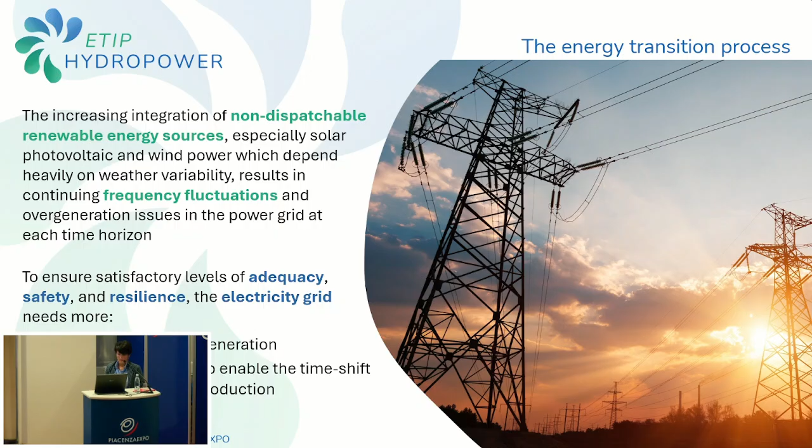And these two characteristics are typical of the hydropower sector. So we have the possibility to refocus the attention on this sector, and there are some values of hydropower that it's important to make people aware of.

Especially policymakers, because hydropower could play a pivotal role in the energy transition, because it can contribute to provide balancing services to the power grid, to stabilize the power grid. And moreover, it has a very important role also in the energy security of European countries, because it can reduce the energy dependence on imports.

This is not subject to fluctuation of fuel prices. And most of all, it's based on European technologies that are of our domain. And it's still the main renewable source that we have at disposal worldwide, but also in Europe and many European countries. So it's a cheap, clean, and reliable energy.

But we have to consider that our assets are aging. As I told you, the energy system is progressively changing. So there are new needs of research, innovation, and development, also in the hydropower sector, although it was considered a mature technology in the past.

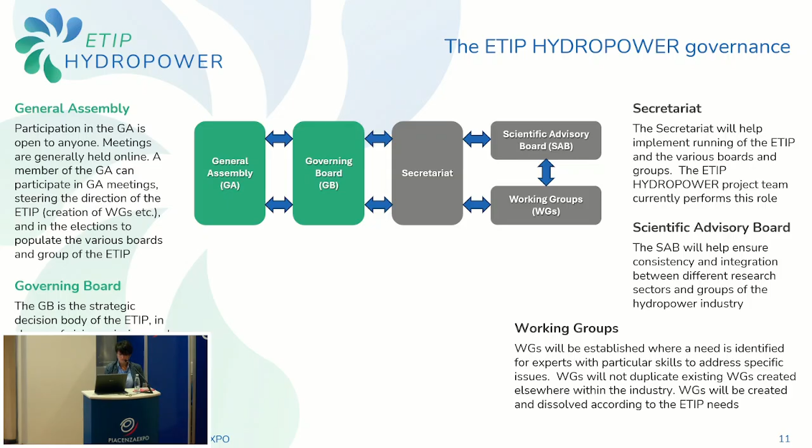An important aspect is that we also establish working groups that have to deepen some issues that we consider a priority of the hydropower sector. And finally, we would like also to have a direct link with the national governments of our European countries. This is important to drive the choice of the European countries and the development of our technologies.

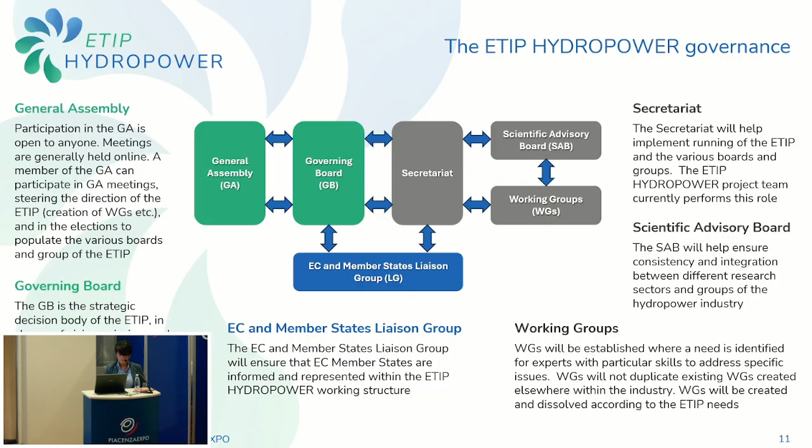Considering the governing board, it has been elected by the General Assembly, so the expertise of the governing board members covers different aspects. We have 5 representatives of the hydropower industry and technology, and 5 representatives of the operators.

We have 2 representatives of the small hydropower plants, because they are also contributing to the energy transition. We have 3 representatives of the designers, planners, and project developers, 2 on finance, business, and insurance, and 5 representatives of research, innovation, and development, so we have the academia inside as well, and 3 representatives of the environmental and civil society sector. We also have a representative of the scientific advisory board.

In total, we have 26 members. The chair is Denis Aelbrecht from EDF, France. I'm a co-chair, one of the two co-chairs, together with Peter Stettner from Andritz.

I would like to show very shortly a tool that is available on the hydropower website: the Hydropower in Europe Research and Innovation tool. It's a very nice tool which gathers a lot of information related to research actions that are ongoing or past, research organizations that are involved in this sector, and the research fundings available in each national country and in Europe as well. I'll show you a slide with some examples of the information you can find in the research action section.

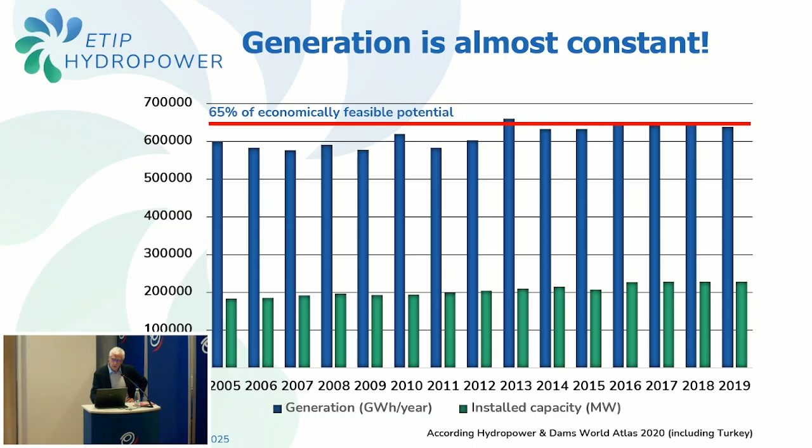So now I would like to discuss the question, what are the main barriers to hydropower development in the European Union? You know, the generation in Europe is almost constant. We have equipped 2/3 of our economically feasible potential, but it's difficult now to tap the last one. However, we see that country by country, there is a potential of hydropower development. You can see on this drawing that a lot of countries have more than 50% of economical potential not yet tapped. And you see now this share of hydro in electricity generation. For example, in Italy, you have well-equipped the country. But now the question is to tap for the energy transition.

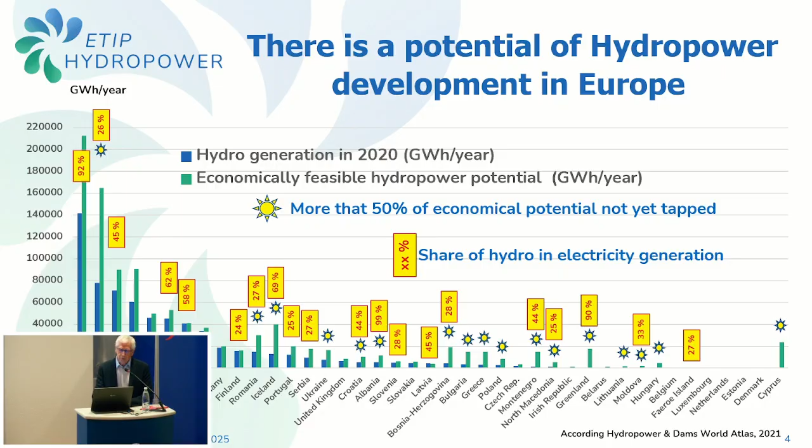There are several reasons impeding hydropower development. And the first barrier is certainly the environmental impact. Look back in the past. In 2000, the World Commission on Dams released a report. It was criticized because it was not really objective. And the conclusion of this report was, do as you want, but if you can do other than a dam, go ahead. In fact, the methods used for this report were not correct.

And some people were paid to protest against them, and 2 experts of ICOLD were paid as well. When it was known, it was a huge scandal. And one of these experts died 2 years after, caused by cancer. So it was a bad period. And at that time, the sector was divided in 2. People willing to improve the environmental impact, and people from third countries saying, no, we have to go on, and this is a strike against our development.

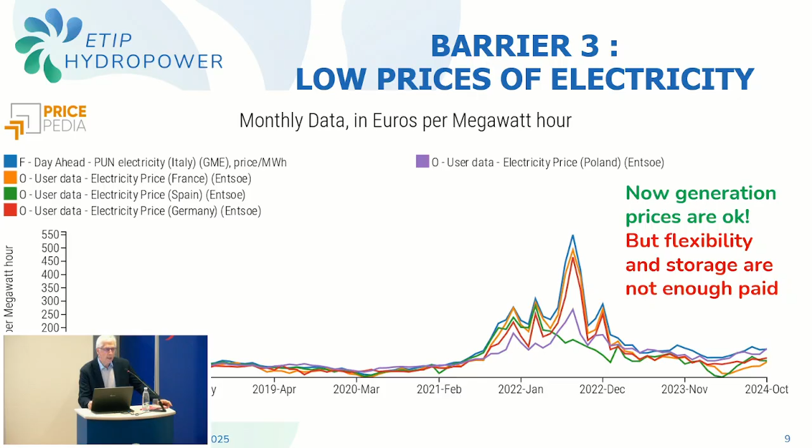A third barrier was the low price of electricity. Up to 2020, up to COVID, you see the prices were very depressed. Then came 2021, Putin cut the gas transport to Europe, and 6 months after, he invaded Ukraine. So you see the consequence on the price of electricity. And now, fortunately, the price decreased, and prices are double what they were before 2020. But the issue is flexibility and storage are not paid or not paid enough. So the next question is how hydropower can overcome these barriers.

The first action is to have dialogue with the European Commission. The good level for economic and technical discussion is the Integrated Strategic Energy Technology Plan, the SET Plan. The SET Plan informs you of energy and research strategies and the new legislation required. And to discuss, we need a place, and this place is an implementation working group. Antonella showed that there are 15 implementation working groups. All energies are in them: batteries, carbon capture, concentrated solar thermal, geothermal, energy systems, nuclear, ocean energy, offshore wind, photovoltaic, bioenergy. But there is no hydropower. How is it possible? So that's why we are demanding this implementation working group. We hope to get it at the end of the year, but it's not certain.

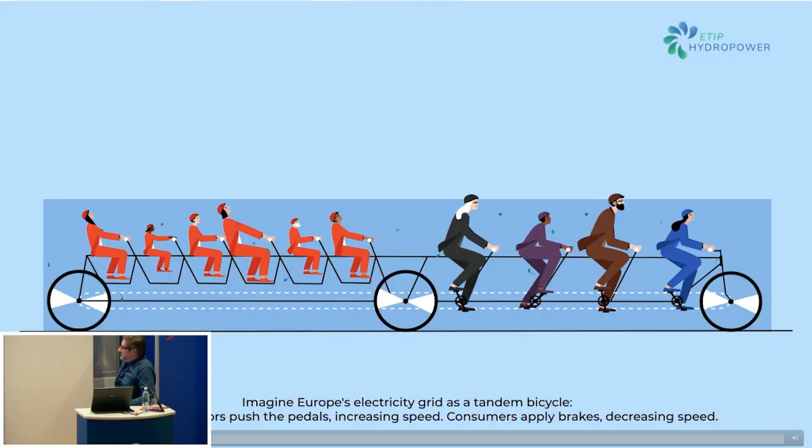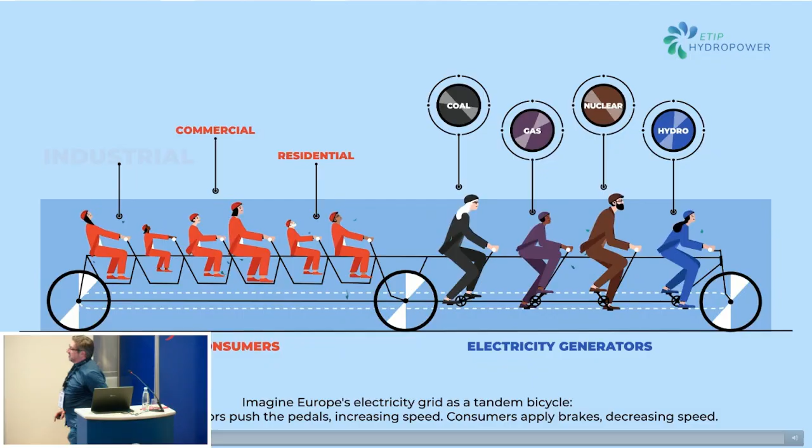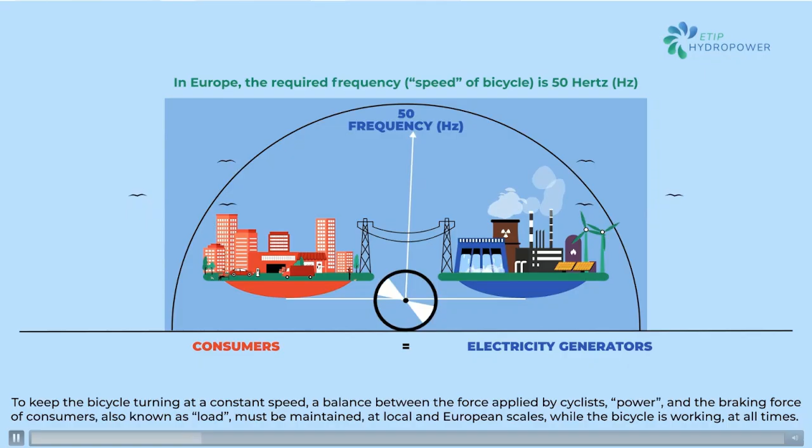ETIP Hydropower Working Group 1 focuses on hydropower's role in providing grid flexibility and energy storage. Imagine Europe's electricity grid as a tandem bicycle. Electricity generators push the pedals, increasing speed. Consumers apply brakes, decreasing speed. To keep the bicycle turning at a constant speed, a balance between the force applied by cyclists, power, and the braking force of consumers, also known as load, must be maintained at local and European scales, while the bicycle is working at all times. Flexibility is the capacity of the generators and some consumers to adapt the force applied to the pedals and brakes to control the speed of the bicycle.

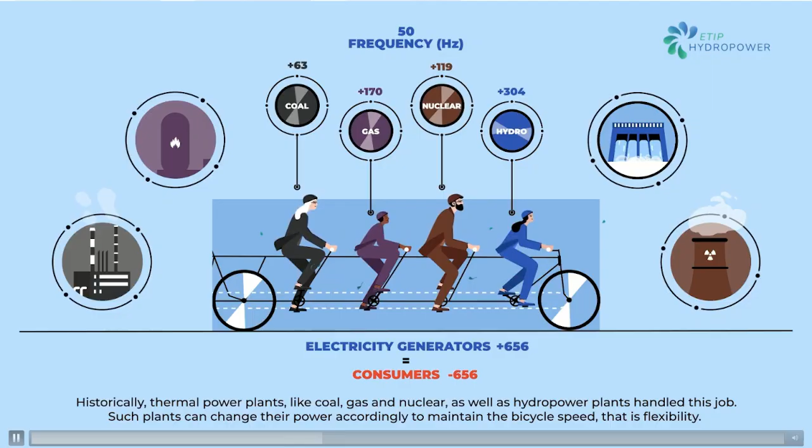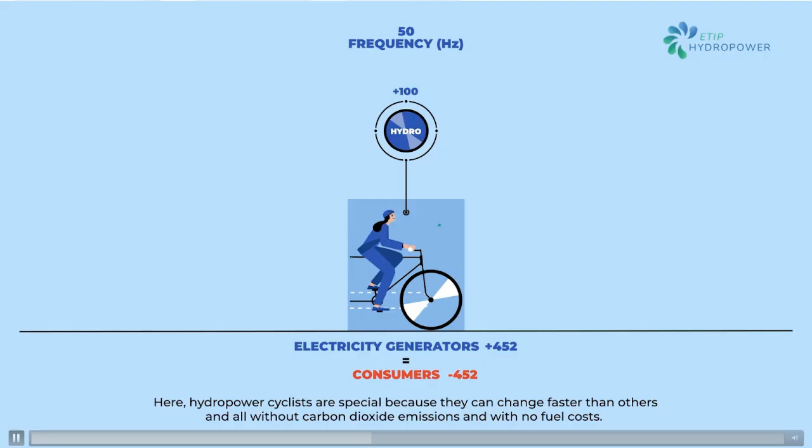Historically, thermal power plants like coal, gas, and nuclear, as well as hydropower plants, handled this job. Such plants can change their power accordingly to maintain the bicycle's speed, that is, flexibility. Here, hydropower cyclists are special because they can change faster than others, and all without carbon dioxide emissions and with no fuel costs. Recently, the bicycle has happily introduced new cyclists, wind, and photovoltaics.

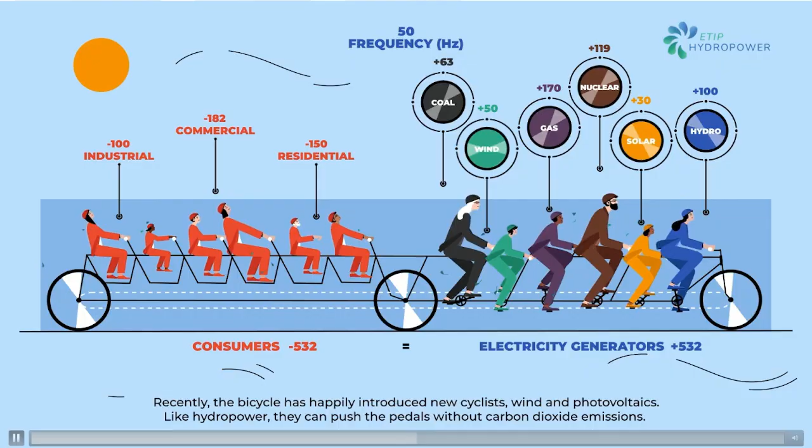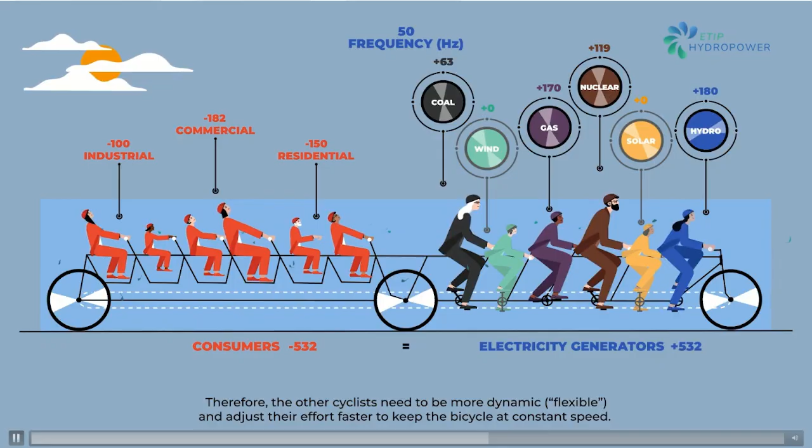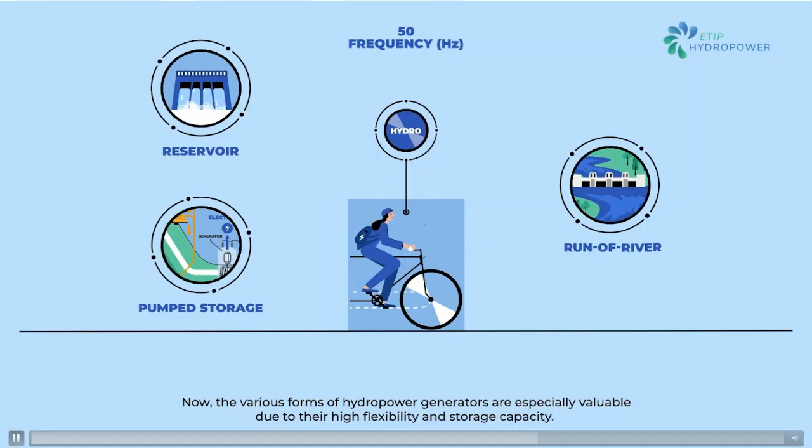Like hydropower, they can push the pedals without carbon dioxide emissions. However, these cyclists have a drawback. They push the pedals only when it is sunny or windy, in a variable and unpredictable way. Therefore, the other cyclists need to be more dynamic, flexible, and adjust their effort faster to keep the bicycle at constant speed. Now, the various forms of hydropower generators are especially valuable due to their high flexibility and storage capacity.

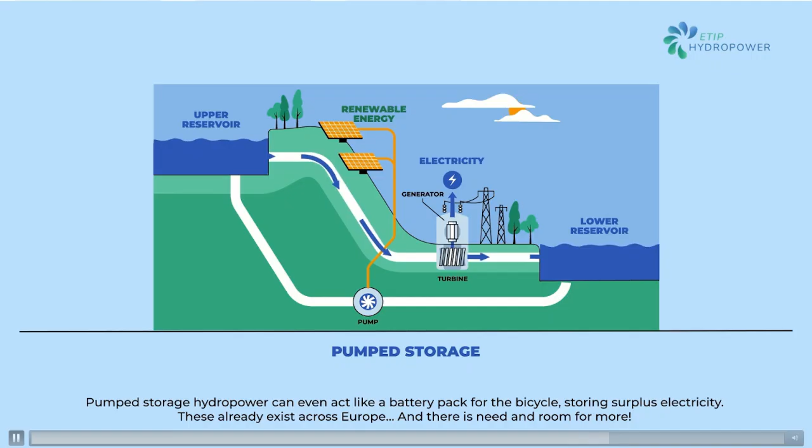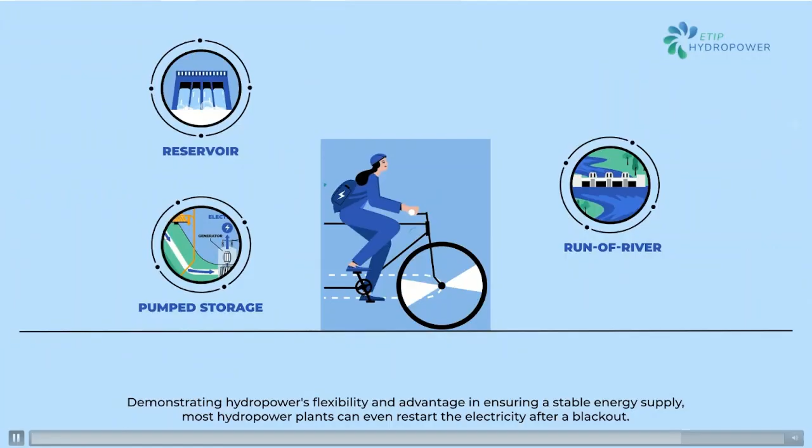Pumped storage hydropower can even act like a battery pack for the bicycle, storing surplus electricity. These already exist across Europe, and there is need and room for more. The working group aims to highlight hydropower's value while addressing key challenges by demonstrating hydropower's flexibility and advantage in ensuring a stable energy supply. Most hydropower plants can even restart the electricity after a blackout, highlighting hydropower's contribution to grid regulation and stability, and showcasing hydropower's multi-purpose benefits like supplying water for drinking, industry, irrigation, and flood control.

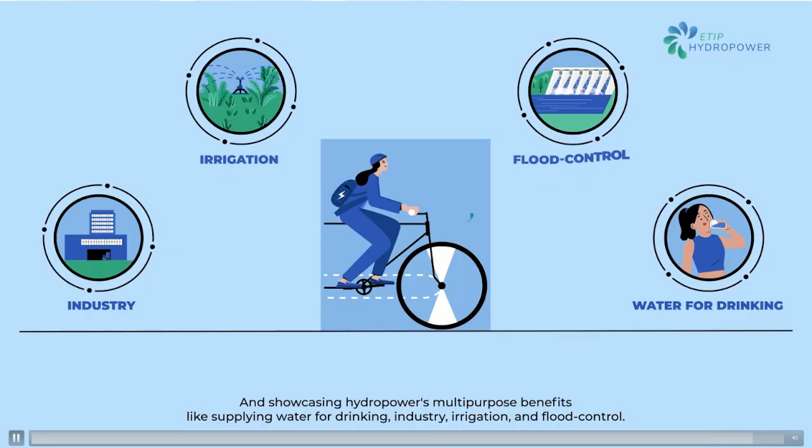Okay. So this is one of the two products of the working group 1 on flexibility. Thanks to Zabala and all that produced the video, and thanks to the work of the whole members of the working group on flexibility who provided the ideas and the script, and that is the result.

So I think this is more or less what we also tried to reach by the white paper that I'm going to introduce to you quite quickly. That is a clear message that can be understood by politicians, by decision makers, and to really say what Jean-Jacques already presented, the role of hydropower that is really set apart from all these discussions. And I will just present a very quick ETIP hydropower introduction that has been already done by Jean-Jacques, then talk about the white paper, and yes, to have later a discussion.

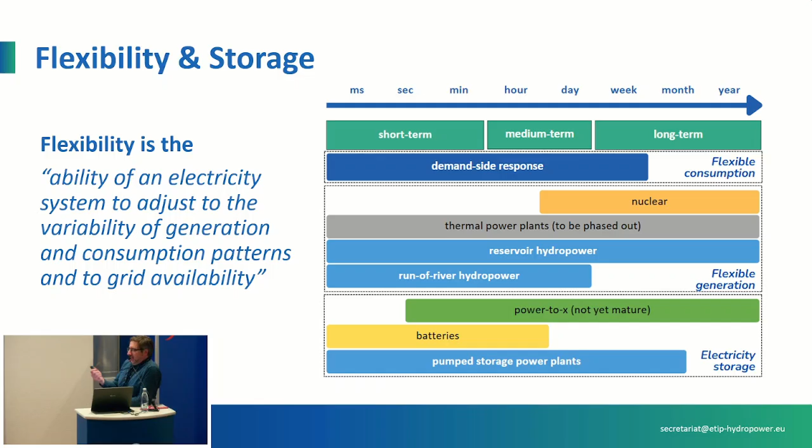And then for the long-term storage, what is really forecasted at the global level is the power to X, so using excess power to produce hydrogen, and then through CO2 and Sabatier having e-fuels or other solutions. Okay, but this is not yet mature, although the technology, the theory, is more or less developed. It's the commercial level that is not really fully mature for this.

Just a couple of slides for those who are not really in the topic. So the flexibility of a power system can be divided into three main typologies. One is the upward flexibility. So when we have too much demand, there are more or less two solutions: either we shed the load or we increase the power plants and the power on the grid.

Then there is the shifting flexibility. That is when I have too much energy on the grid, I store it and then I use it later. Okay, this is the role of batteries and of pumped hydro storage in our case, the most.

Okay. Then we have the downward flexibility, that is when we have too much, and this is something that is happening even more often, that we have too much solar, too much wind on the grid, and it overcomes the load, and then we have to, in some way, either curtail or increase the demand, and we go in the direction of demand side response. Or in other cases, it is to store.

And the storage is one of the four pillars of flexibility. So we have energy storage, and in our case, when we talk about hydropower, it is dams, or better in some cases, pumped hydro storage. Then we have demand side management. We have flexible conventional generation, and here also hydropower plays a role, although it is mostly played by turbogas, okay? And then the grid extension.

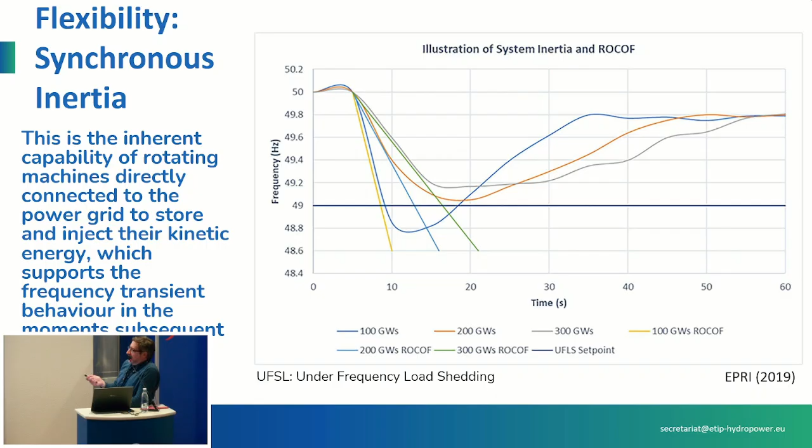So we prepared the white paper. It was written by the working group 1 members, 75 members, and we collected the information. It's 6 pages if we don't consider the cover and all the references and the other parts. It's more or less 6 pages that condense the contents and the work of the group in a simple and clear way, to bring the message to the widest audience, and especially to decision makers, okay?

And hydropower's role has been put into evidence with also a couple of examples, especially of pumped hydro storage. And one of these was taken more or less as a reference, and it's very interesting. Those who have the opportunity, go and visit this fantastic plant, I would say. That is the Kops 2 from Illwerke VKW.

Since 2008, this is a pumped hydro storage with a ternary group and hydraulic short circuit, and it has nearly 100% flexibility, both in generation and in pumping, okay? The flexibility in generation is usually not such a problem, even for all the standard hydropower plants, but the flexibility in pumping mode is always a big issue.

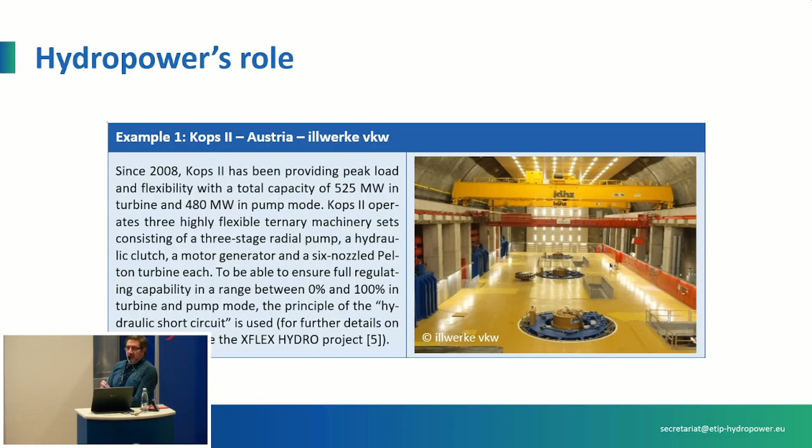For this, there have been developed several new solutions: variable speed pumps, binary sets, pump turbines, or ternary sets with a short circuit, which really creates the possibility to follow the load of the grid in a very precise manner. The same for Grand'Maison, France, another important pumped hydro storage plant, with 8 reversible pump turbine units and 4 Pelton turbines that also give a very high flexibility of the plant.

Which is the role of hydropower in flexibility? With this matrix, we can show that hydropower, except for fast frequency response, can provide, not in all cases but in many, more or less all the ancillary services related to flexibility that are needed for the grid.

Synchronous inertia, if we have synchronous generation, okay, because in the case of variable speed, using asynchronous generation or power control, you lose the synchronous inertia, just like in wind generator type 3 and 4. But there are ways to correct this too, by synthetic inertia, with grid forming inverters.

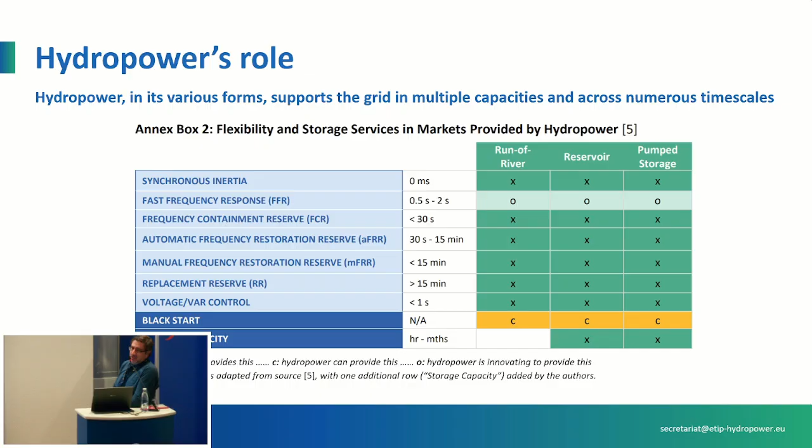Then all the section of the frequency containment reserve, so FCR, or the automatic and manual frequency reserves are available. Replacement reserve, voltage, VAR control, that would have been very important in Spain during the blackout. The capability of black start, hydropower plants can provide black start capability, and storage capacity that, except for run-of-river, reservoir and pumped storage, especially pumped hydro storage, can provide this ancillary service.

We collected all this information. I will show you later a QR code where you can scan and go to the ETIP Hydropower website and download the working group 1 white paper.

The demand of flexibility is increasing, and that flexibility also brings the need to operate with high flexibility. For hydropower plants this is also an issue, because most of our hydropower plants were developed up until the end of the last century, when we had more or less very controllable power provision on the grid, and there was not such big variability.

Since more or less 15 to 20 years, variability has increased on the grid due to the presence of solar and wind. This leads to wear and tear of the machines, and this is an important issue.

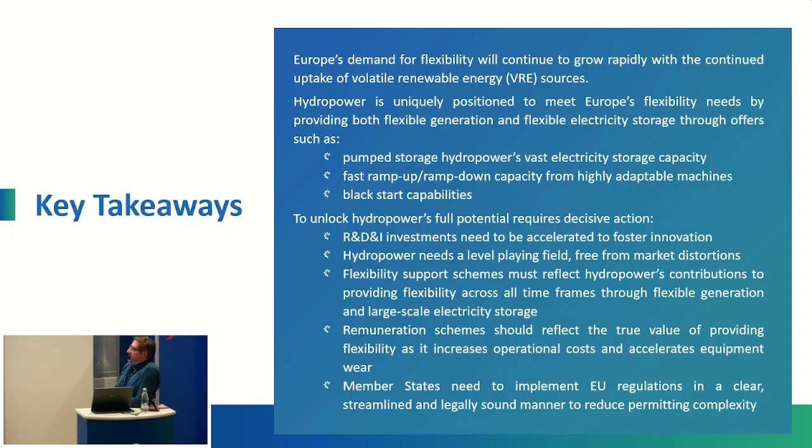Remuneration schemes should reflect the true value of providing flexibility, as it increases operational costs and accelerates equipment wear, as I told you. We need clearer EU regulation for hydropower. So for the white paper, we focused on the need for research and innovation, system planning, clearer policy and regulation, and investment and market.

I wanted to show you a few slides that are not in the white paper, just to better communicate the important role of hydropower. As you know, I think everybody knows what happened on the 28th of April in Spain: there was a big blackout across the whole Iberian area, including Portugal.

The analysis by ENTSO-E and Red Eléctrica is still ongoing, and we will have the final results at the beginning of next year. But at least it was published on the 3rd of October, five days after we issued the final version of the white paper. And it's clear that there was a decisive role of hydroelectric power in restoring the Iberian electricity grid.

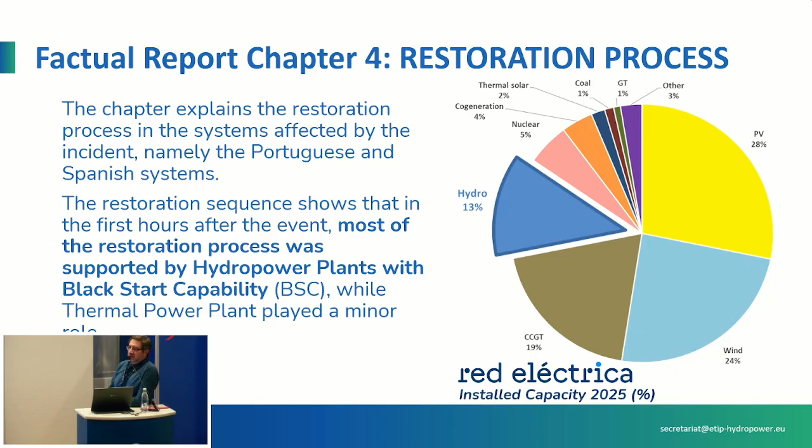Keep in mind, this is for Spain, not Portugal. In Spain, hydro in terms of installed capacity, not energy production, accounts for more or less 13% of installed capacity. There's also a lot of PV and wind, and at the moment of the blackout there was a lot of PV running, especially in the south of Spain.

The restoration process started a few minutes after the event.

I went through the factual report, which is the only official data we have up to now, and I highlighted in blue the intervention of hydropower to restore electricity. In some cases there were also plants that were not able to contribute — for example at 15:25, the hydropower plant in Andalusia with black start capability was not able to get into the frequency.

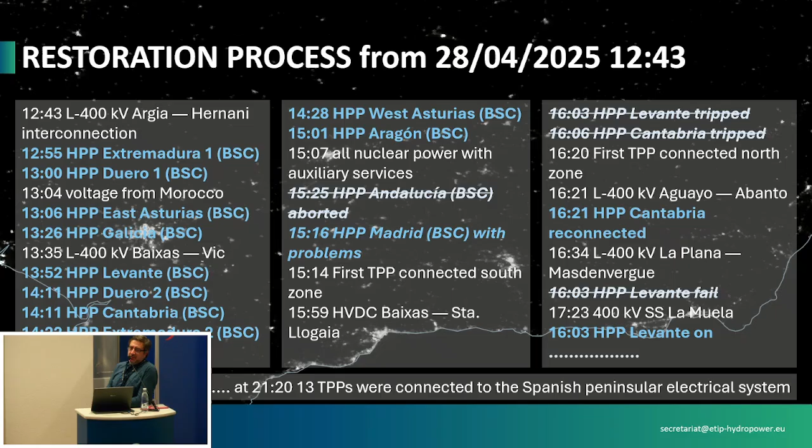But as you can clearly see at a glance, apart from the very first interconnection through the Pyrenees — the Argia-Hernani interconnection — the role of hydropower was more than important. Despite the fact that we have turbogas and other possibilities, hydropower was what really led the grid back to work.

Another important thing I wanted to point out is a review I did about three years ago, to understand the information about the inertia constant of a power plant. This data is quite complicated to get, and most of it comes from studies in the US, so you have to rescale for frequency since they use 60 Hertz. I also had a discussion with Julia Matevosyan on how to manage this.

From a physical point of view, the inertia constant represents the time it takes for a generator rotating at rated speed to come to a full stop, while no mechanical power is provided and rated electrical power is extracted. The higher the inertia constant, the higher the inertia that can be provided to the grid.

Historically the highest inertia constant is due to gas turbines, but hydropower is absolutely in line with this, based on different data points from various technical papers and reliable sources. Wind and PV, now type 3 and type 4 wind turbines, have zero inertia, and even with grid-forming inverters, wind doesn't seem to work well for this. PV can work, and batteries work very well with this.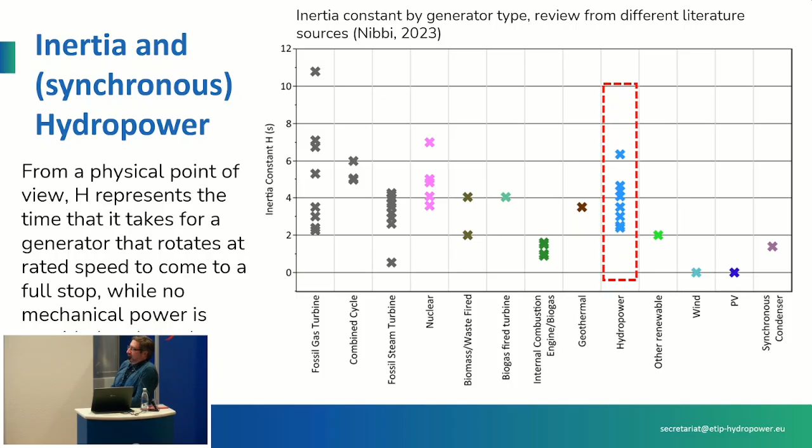I want to close with this: pumped hydro storage, until a few years ago, represented more or less 95 to 98% of electricity storage at the global level. In the last year, especially due to regulation and investment in China, we've seen an incredible development of batteries. This is from last year's IEA report on batteries and secure energy transition.

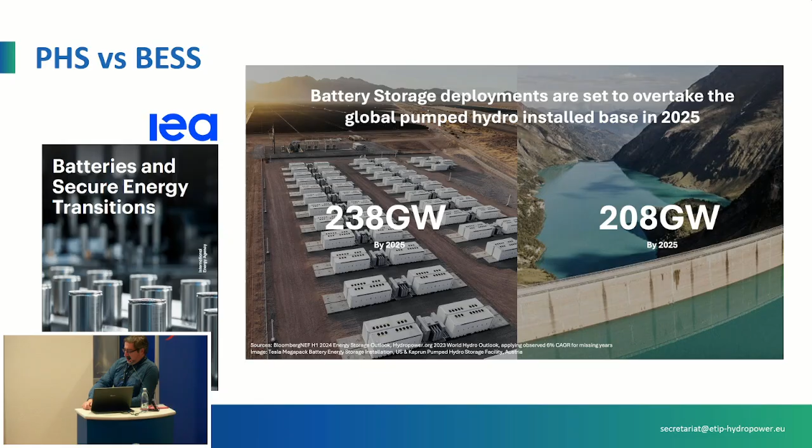In terms of capacity, not energy stored, batteries are set to overcome — I don't have the latest numbers, but they should have already overcome — the capacity of utility pumped hydro storage. A few years ago it was only a fraction: in 2020, 10% was battery and 90% was PHS. Now we're more or less equal.

Obviously, when we talk about batteries, we're talking about two to four hours of storage — so if you have one megawatt installed, you have two to four megawatt hours of batteries, even more for bigger systems. This incredible development has been led by several factors.

One factor, just to show how policy can work: in recent years in China there's been a regulation that every large renewable power plant put on the grid had to have storage installed. This has led, in the last three years, to this incredible growth.

The cost for batteries in China, at the standard Chinese level — bringing them into Europe is another thing — is now down to around 60 euros per kilowatt hour. If you search on Amazon for a 15 kilowatt hour home battery, just the battery costs 116 to 120 euros per kilowatt hour. We're very near the cost of pumped hydro.

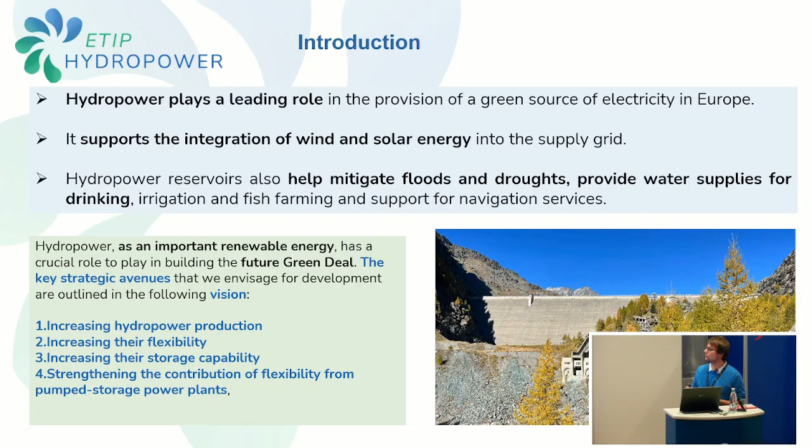So what is important from the hydropower perspective is not only that, but also to take into account all the biodiversity that is starting to interact with this type of infrastructure.

In order to highlight this part, we have made some white papers around the biodiversity topic. A white paper is a very useful instrument, as Leonardo highlighted, to deliver complex topics in a simple way. It's especially useful for policymakers, but also for common people who want to dig a bit deeper or be introduced into this type of topic.

So we can start with the presentation of the white papers, which covered three main different topics: one about fish mobility, another about e-flow and hydropeaking, and the last about sediment dynamics. Here we can see all the team coordinators we have worked with on the construction of the white papers, and the working group was mainly split into three different parts.

Me and Marco, since we work mainly on sediment at RSE, have participated actively in the third team. But now I will present an overview of these white papers. Here we have the cover of the white paper, about 5 pages for each topic, which will be delivered by the end of 2025 this year.

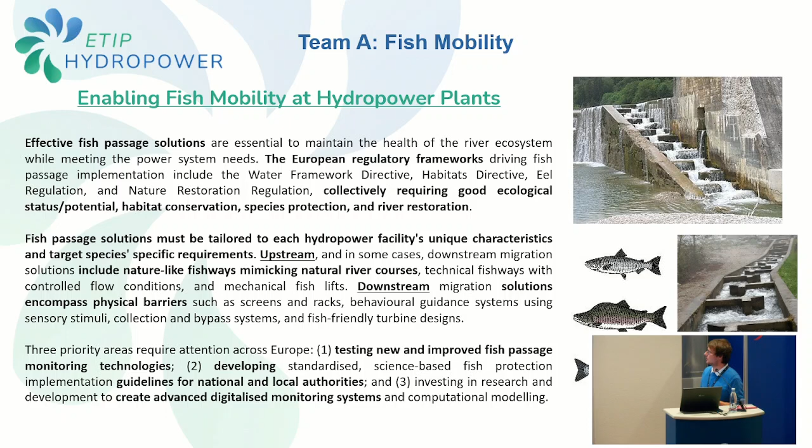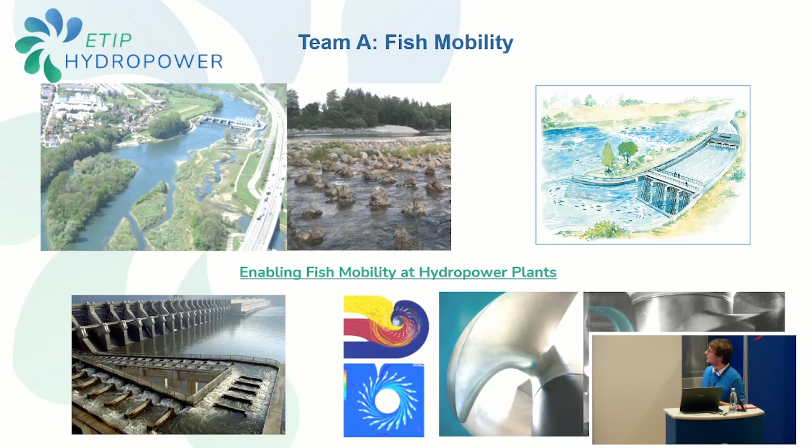And then, of course, now digitalization is becoming much more important. Also for the monitoring, it is a key instrument that can be implemented in order to enable a better managing of this type of topic. And here we have also some solutions that were described inside the white paper. We have some solutions that are acting at the level of the plant, but also that involve the construction of the turbine.

Then we can move to a topic that, especially in Italy, was very critical in the past years, but now, due to climate change, is rising again. That is about the environmental flow. In Italy, it's called flusso ambientale or minimo deflusso vitale. That is important because there is a sort of balance between the energy production and the need to maintain the environmental flow, especially for the downstream part. As we can see, the presence of dams can block the passage of the water and can alter downstream the normal flow of the water. So we need to try to find a sort of trade-off between production and maintaining the environment.

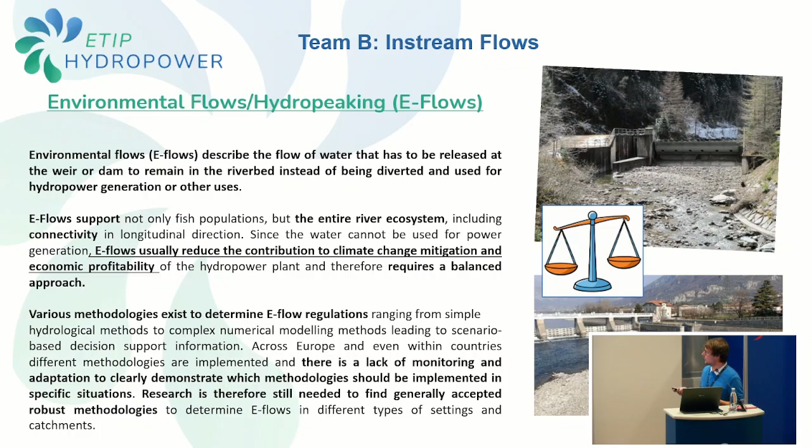At the level of Europe, the panorama is very complex, and we have different types of implementation models, starting from very simple hydrological rating that was used, for example, in Italy to estimate the minimo deflusso vitale, and then moving to much more complex models considering not only the hydrological and hydraulic rating, but also habitat modeling that is sometimes quantitative but also qualitative, and then we have much more integrated methods that are the desiderata for this type of analysis.

In Europe, we have several types of methodology that were applied. And we can see that there is not a homogeneity. For example, we have a holistic approach applied in France. We have a habitat approach mainly applied, for example, in Italy. We have other approaches, for example hydrological, applied in Poland or in Ireland. So there is not a common strategy in order to solve, to interpret, and to manage the in-stream flow.

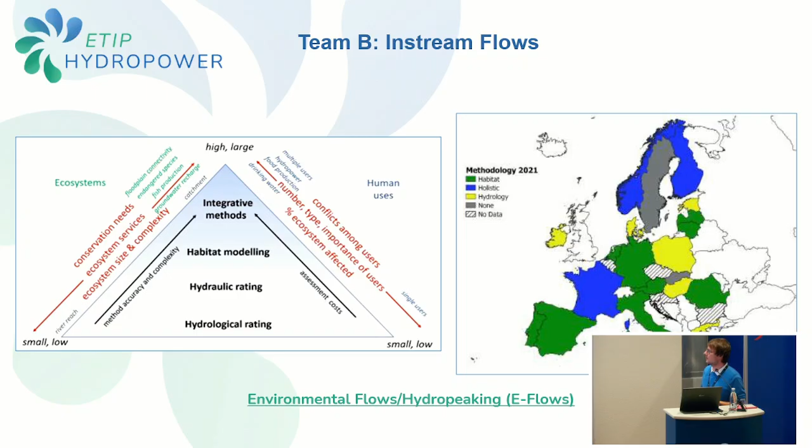So what is important is to say, okay, we are a European Union, we need to try a common technique, a common methodology in order to develop a common strategy on in-stream flow management, because it's critical, especially, as I said before, due to the ongoing climate change that is modifying all the criteria that were established in the past for hydrological and hydraulic rating.

Then we go to the last part, then I leave the floor to Marco, that is about sediment dynamics. Sediment dynamics, especially in Italy, but we have discovered that this problem was also experienced by other countries such as Austria and Germany. The sediment dynamics interacting with the dams was a problem not taken properly into account until now, when we have, especially in Italy but also in other countries, infrastructure that has an important lifespan.

So we have reached an age of about 70, 80 years from the construction of this type of infrastructure. So if a proper sediment management technique has not been taken into account, now we are facing problems with the siltation of the infrastructure. And the siltation can reduce a lot the storage capacity of this type of infrastructure.

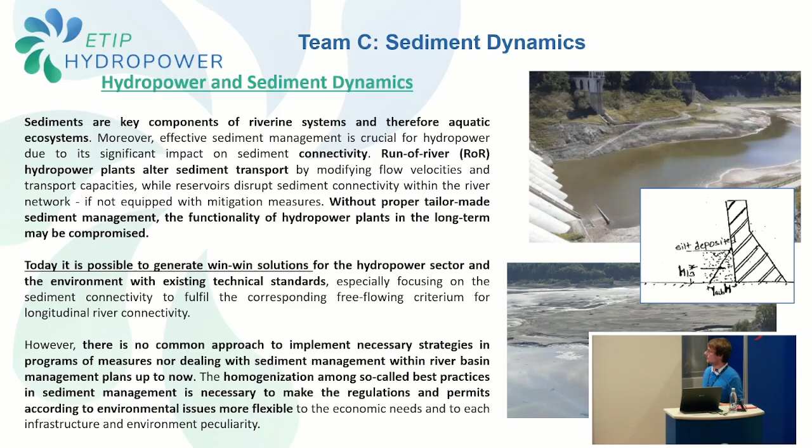For example, in Italy, we have the problem that up to now, the sediment from the reservoir is treated as special waste, so it cannot be reused easily. It should be stocked in a special place, and so the costs are not feasible. So there are some problems that need to be overcome in order to maintain the capacity of this type of infrastructure. Here, just a figure about the processes that are involved.

As we have seen, the dams are inside a basin, inside an environment, so we need to take into account all the geological processes that are present in the basin context, and also the characteristics of each infrastructure, because regarding the sediment dynamics, each dam is its own case study, because there are several processes that could occur, especially the sedimentation inside the basin.

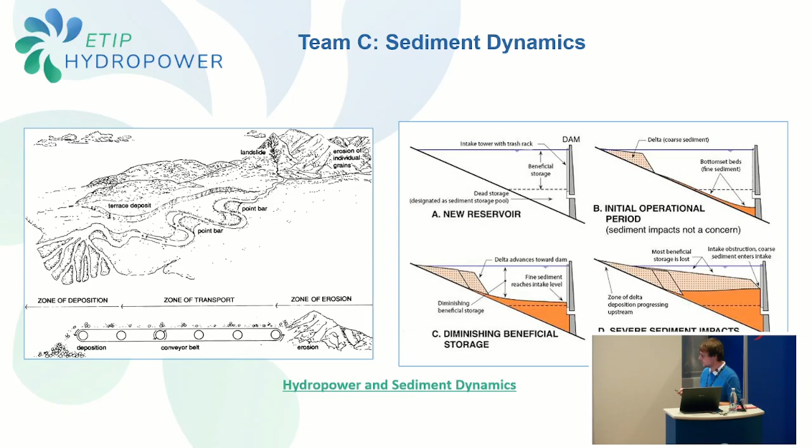So the take-home messages are more or less the messages that I've already commented. For example, regarding the feasibility, we need the practical use of models and digitalization. We need to improve the design of this type of infrastructure, and we need to have a strategic vision, because the effects are not immediate, and we need to monitor them in the long term.

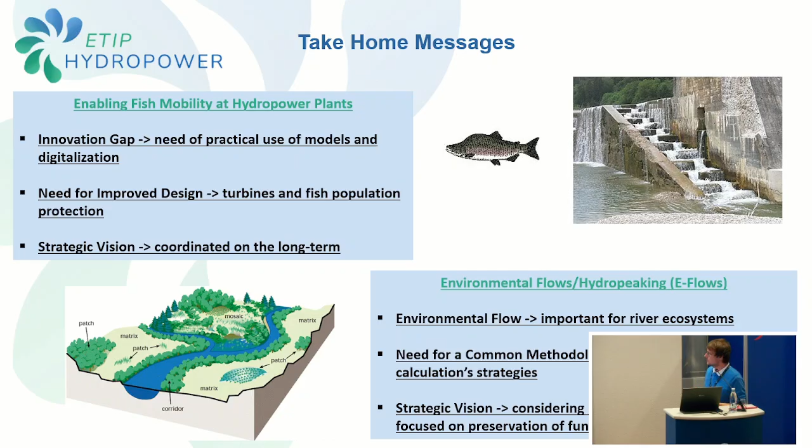Then, for environmental flow, we need common methodologies across the different countries of Europe, and also a strategic vision in order to preserve the habitats that are settled downstream. And then for the sediment dynamics, we need, of course, a balance between the ecological needs but also the economic needs of the sediment management.

And then we need also a strategic vision that should not look only at the single hydropower manager, but an approach considered at the level of the basin, taking into account the different stakeholders that are acting on the same basin. Then I can give the floor to Marco about the part of the sediment dynamics that we have done directly in RSE. Thank you very much.

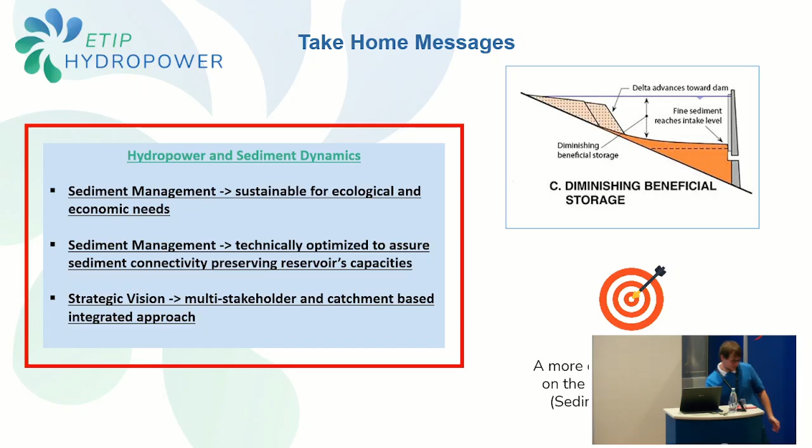Okay, thank you, Andrea, for the presentation. So as Andrea said, we focus mostly on sediment connectivity, which is our specialty here in RSE. And in this presentation, I will give you a basic idea of what we mean by sediment connectivity, what happens when sediment connectivity interacts with human infrastructure, and how we can mitigate these effects. And also, as a final topic, how the European Union has responded to this kind of problem.

So, what is sediment connectivity? Sediment connectivity is defined as the connected transfer of solid material across a river network. Now, by itself, that doesn't tell us much, but once we try to understand and quantify the sediment transfer, we find a lot of problems. First of all, it is a distributed process. That means that it emerges from different sources, and these sources interact across time and space. And as they are distributed, it's difficult to pinpoint an exact cause and effect of any changes we find.

So in general, we can say that the river network has some areas of erosion where solid material is removed, some areas of transport where it's just transported across the network, and some areas of deposition, usually deltas or river environments. But even this definition is not fixed. Imagine that, for example, an area of transport can become an area of erosion when we have high flooding, or an area of deposition can become an area of erosion again when we have, for example, movement of the river system or even high tides.

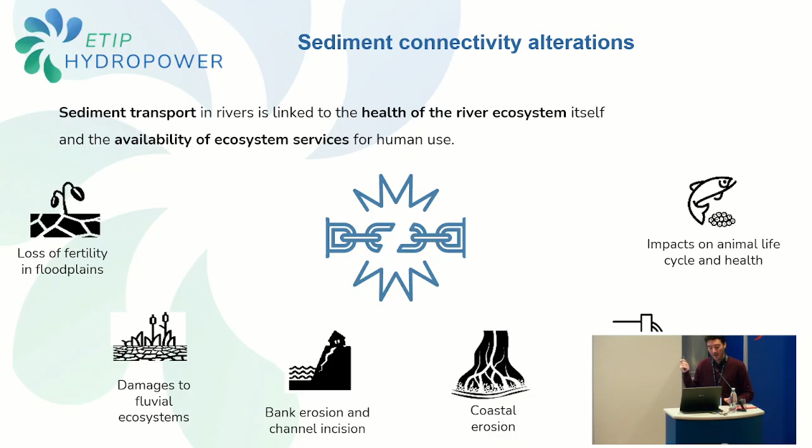Again, it's a complex system, but now we want to see what happens with our infrastructure, so hydropower infrastructure. So how does hydropower interact with the river? Well, first of all, we have to see which kind of structure we're talking about. With run-of-the-river power plants, of course, we have removal of water from the river. That changes the hydrology and the sediment density. If we're removing water, we have more sediment in the water that remains in the stream. That could cause some problems for the fish species.

For large infrastructure instead, the problems are typically more evident. One of these is clearly siltation. Reservoir siltation, so we have a loss of storage due to the fact that over time sediment is accumulating in the reservoir.

We have foot erosion and problems downstream of the reservoir, because water typically has a capacity for transporting solid material. The water released from the reservoir is usually deprived of sediment, so we call it hungry water. It is hungry for material. If it doesn't have this material, it will find it somewhere. And that could cause local erosion at the foot of the reservoir, but also changes in the shape of the river channels downstream. And typically we have way more erosion that could cause problems for the infrastructure downstream.

We also have structural damage to the mechanical components and turbines. That's something that is very well known. We don't want sediment in the water for the turbines, but the problem could also be that sometimes it's very difficult to remove old material from the turbines.

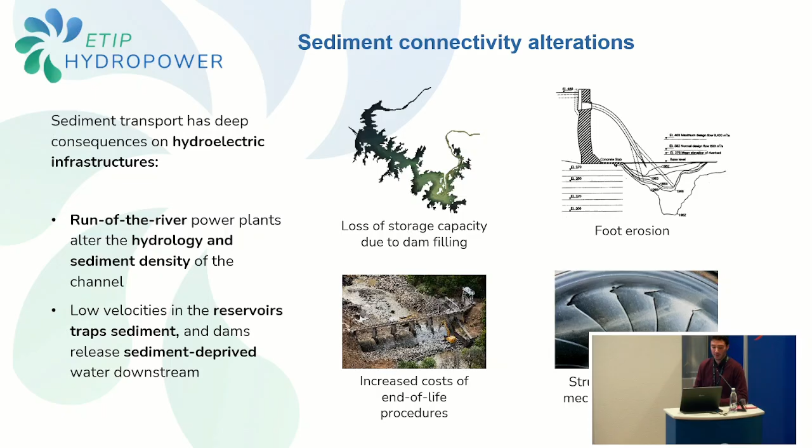Okay, so how do we manage this problem? I hope I gave you an idea of why sediment connectivity is important. It's often overlooked because, again, it's a slow process. It takes time, especially for a reservoir that's very big to fill up. And so it's kind of like climate change. If we ignore it, we will see the effect later and in a way more expensive and impactful manner.

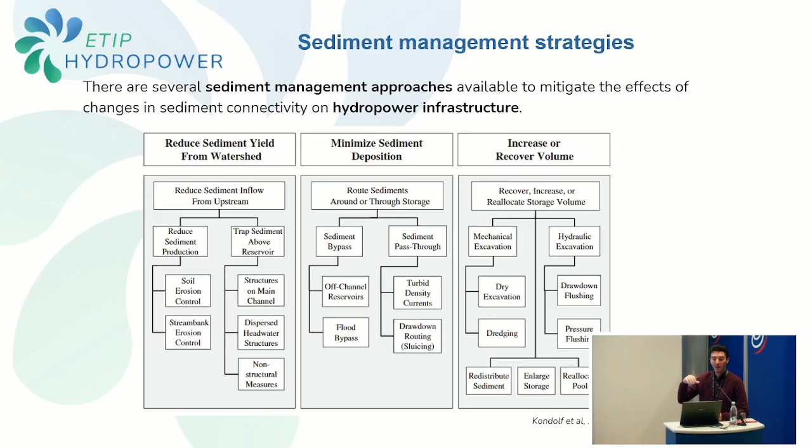So how do we manage sediment? Well, there are a lot of ways. In this paper by Kondolf, we have a simple classification. So if we want to protect our reservoirs, first of all, we may try to reduce the sediment coming from upstream. That's, again, very difficult because sediment transport is a distributed process, so there is not a single source of sediment. But we can do something. We can create, for example, stream bank erosion structures on the main channel, or small reservoirs upstream of the main reservoir to fill up with sediment.

We can, for example, minimize the sediment deposition. That means that we allow sediment to come to a reservoir but we stop it from silting, from depositing. So there are some methodologies, for example, bypasses or just using sluicing or flushing to move it through. Or we can recover this volume.

This is the most classical approach. One way is to completely empty the reservoir and remove the sediment mechanically. It's incredibly expensive, but it's one of the more flexible ways to do this. We can use other methodologies, for example, flushing and drawdown flushing, or dredging without the need of emptying the reservoir. But again, a lot of methodologies.

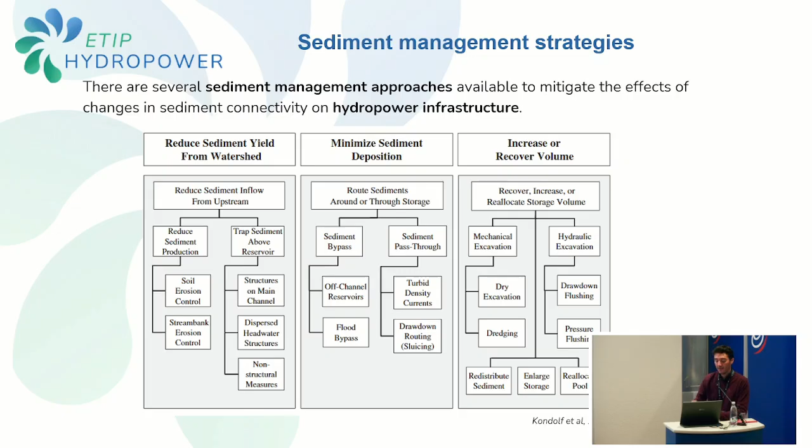How do we choose which one is the best? Well, first of all, we have to define two different categories: structural versus non-structural measures. A structural measure is something we plan for when we build a reservoir. For example, the most classic one is to create a dead storage. That means to create an area in the bottom of the reservoir whose only purpose is to fill up with sediment, so we don't lose the active storage.

Another one could be to create a headwater structure upstream that is going to fill up with sediment, but from which it is very easy to remove sediment. So it's cheaper to remove the sediment from the headwater compared to the main structure. Or we can do something more complex, for example, create sediment bypasses, a channel that diverts flood water, which is very sediment-filled, downstream of the reservoir, or just build the reservoir not on the stream but off-stream.

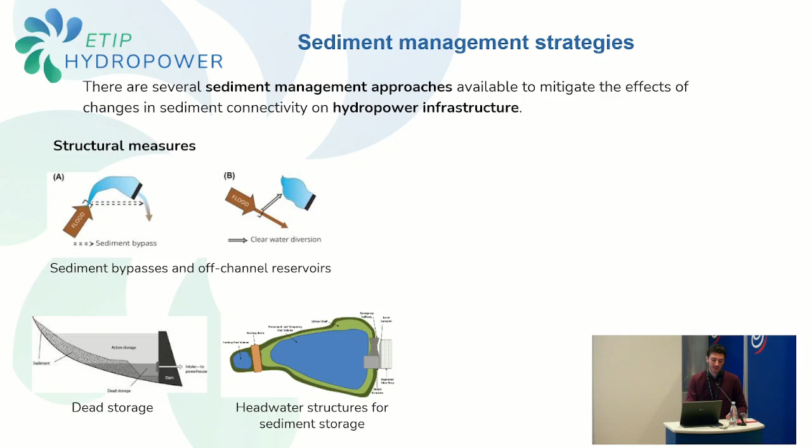And then we have non-structural measures. This is something we can do to a reservoir once it's already built. Dry excavation is the easiest one. Not easy, it's very expensive, but it's the simplest to understand and to proceed with, because it's very flexible and can be used for many reservoirs. It's basically emptying the reservoir and excavating.

Dredging means removing material while the reservoir is still full by using pumps, mobilizing the deposited material downstream, and then maybe using geotubes to store the water rich with sediment. We have others, like sediment sluicing and drawdown flushing or sediment flushing, where we use the energy of the river itself to remove sediment.

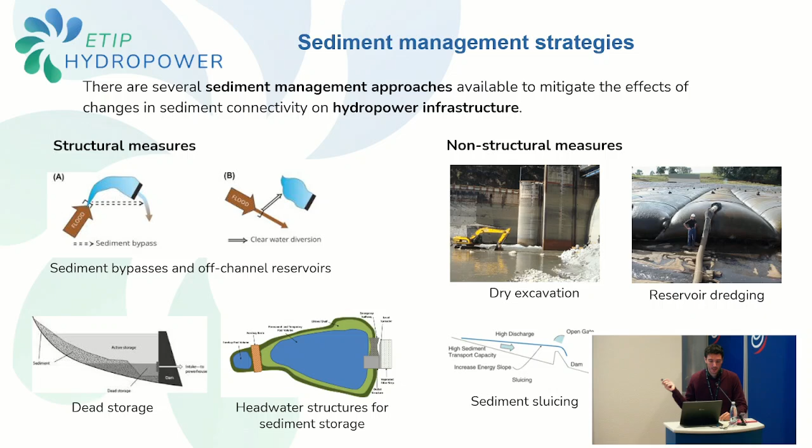Of course, this division is not very strict. For example, some drawdown flushing actually requires some structural measure beforehand; we have to create a bottom outlet. But it's a good way to distinguish these kinds of operations. But again, the problem is that sediment connectivity is a distributed process. So even if we do sediment management in one of our reservoirs, the impact will be felt across the entire river network. And then imagine expanding this to a large river system where we have multiple reservoirs.

Maybe we have different countries bordering the river system. We have different operations. We have deforestation, industrialization, multiple barriers, and then we have some natural dynamics, for example, landslides or flooding. It's a very complex system. And so it's very difficult to understand the consequences of our actions across time and space.

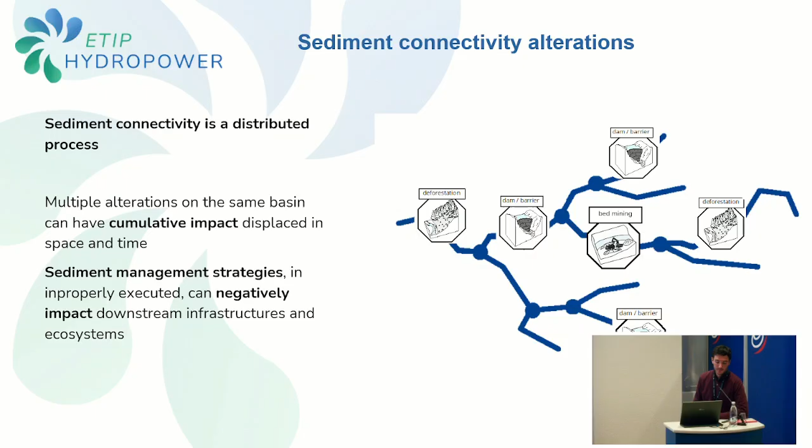Now, let's go to the European common practice. So how does the European Union address this problem? First of all, if you look at the Water Framework Directive, we see some mention of sediment, especially when we try to characterize the water body type, the risk analysis, and so on and so forth. But there is no common strategy. There is no common strategy, and even if there is a strategy, it is mostly localized on the infrastructure level, so on the dam level, or, if the dams are owned by a single operator, to the entire complex owned by the operator.

And there is also a problem, as Andrea was mentioning, of sediment disposal. So what do we do with this sediment? Do we release it back to the river if we want to remove it? Do we take it away and put it somewhere else? How do we consider sediment as a waste? Is it a special waste? Is it a waste that we can remove easily? Should it be cleaned? The different ways to manage this sediment will affect our cost and how we proceed in sediment management operations.

Now, again, this is not completely wrong, because as we see, sediment connectivity is very dependent on the case study. Each case study sometimes requires a tailored solution to this kind of problem. However, if you look at Europe, we don't even have a connective framework for sharing best practices or efficient or effective methodologies to address this problem. So basically, we are left with a lot of differences in legislative maneuver. For example, we have different levels of legislation: at the regional level, state level, at the level of the single operation. Maybe some of them are given by the single company and stakeholders. So a lot of confusion, a lot of different practices, and this lack of communication hinders our ability to address this kind of problem.

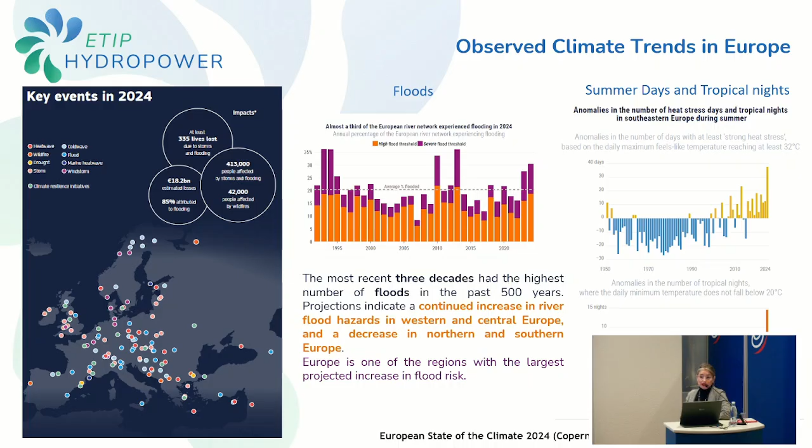On the right side of the slide you see the other side of the problem, the summer days and tropical nights, two indices represented here in the diagram showing the trend of hot extremes in Europe over the last 3 decades.

As they are able to well reproduce the past, what do the climate models say about the future? If we consider intermediate scenarios, numbered 4.5, shown with the black rectangle, with decreasing emissions after the middle of the century, we have at the end of the century an increase in temperature all over Europe, represented here by the anomaly compared with the period 1981-2010.

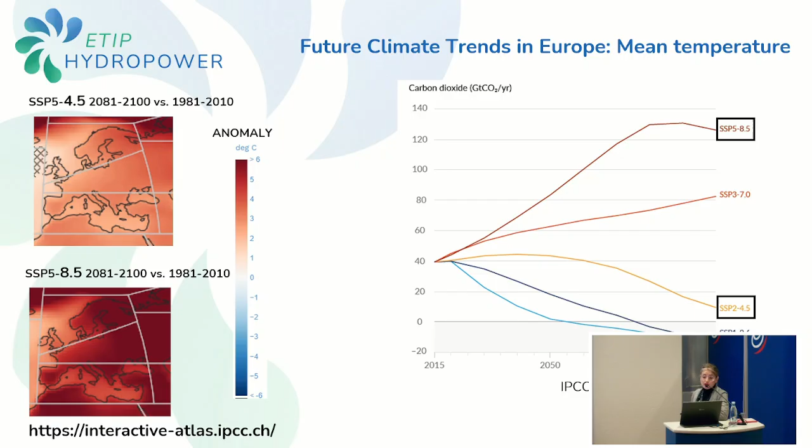But if we consider the most pessimistic scenario, numbered 8.5, the anomaly is more pronounced all over Europe at the end of the century.

If we follow this anomaly on the y-axis by month, with January on top and December at the bottom, and divide Europe into three main areas—Northern Europe, Western and Central, and Mediterranean—with three different colors, we can see an increase, particularly in the second part of the century, of temperature in the winter months for Northern Europe and in the summer months for Western, Central, and Mediterranean Europe.

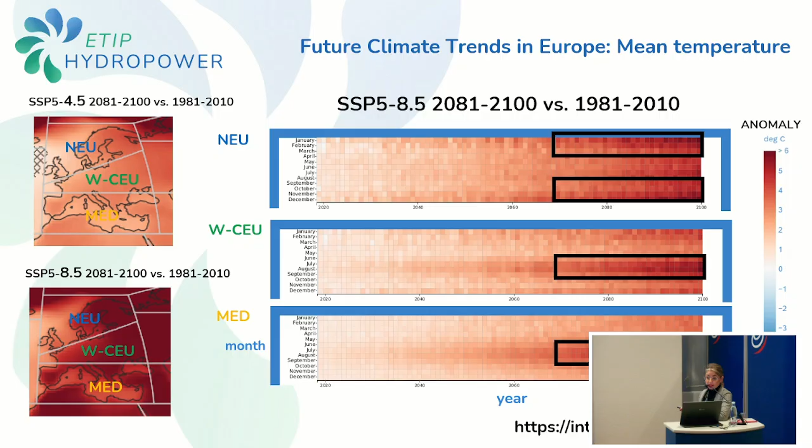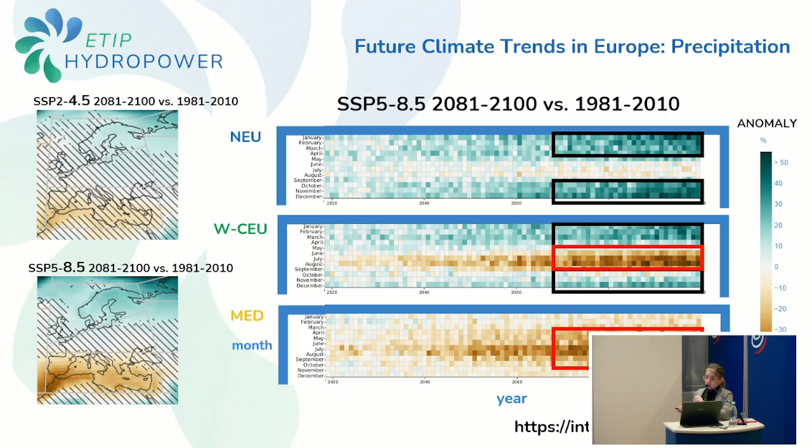And this results, for Western and Central Europe, in an exacerbation of the differences between winter and summer conditions for precipitation.

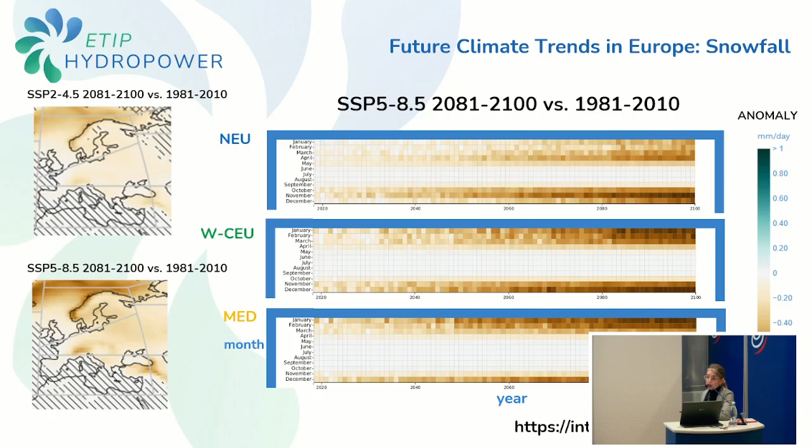If we focus on snow amount, we see that in both scenarios and all over Europe, we have a reduction in the snow amount at the end of the century.

What are the consequences for our basins? We will pass from a snow-dominated to a rainfall-dominated basin, because in a warmer world, less winter precipitation falls as snow, and snow melting occurs earlier in spring, with a shift in peak river runoff to winter and early spring, an increase of winter discharge and decrease in summer discharge, resulting in an increase of the frequency of peaks and low flows, with higher peaks and longer low flow periods.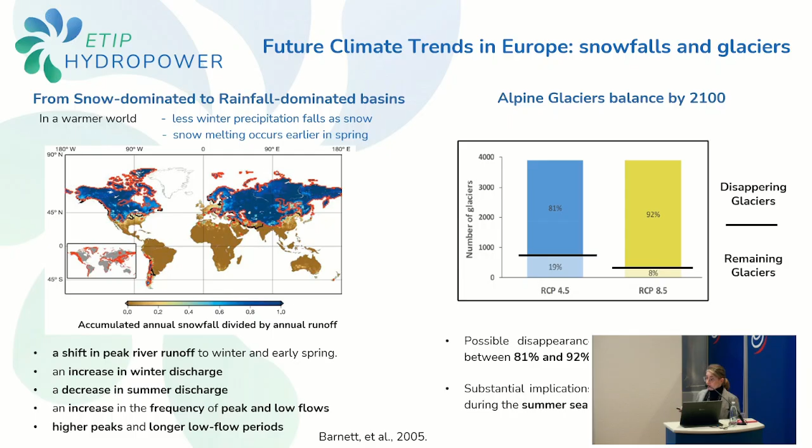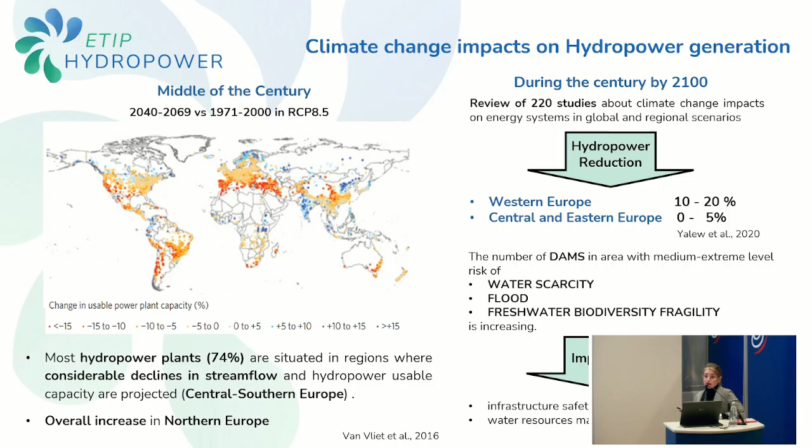If we are interested in hydropower reservoir plants, the number of dams in areas with medium to extreme levels of risk of water scarcity, floods, flash floods, and biodiversity fragility is increasing, with implications in particular for the safety of infrastructure and also for water resources management among sectors like agriculture, tourism and energy.

Because there are such huge differences between Northern Europe and Southern Europe, I'd like to show you three exemplary cases: one for Norway, one for Portugal, and one for Italy.

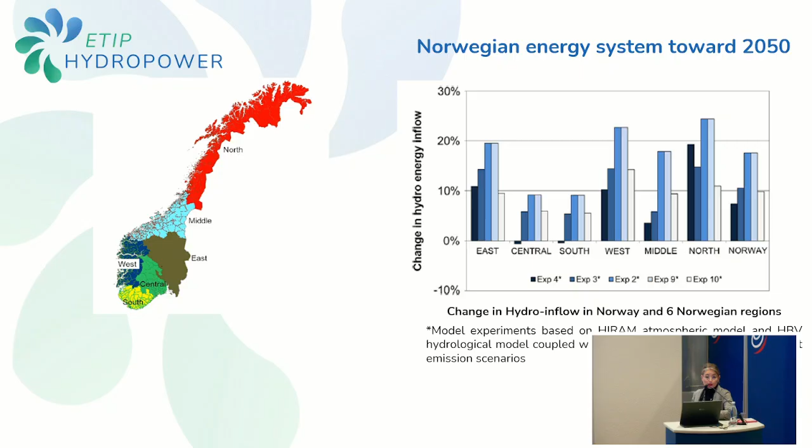And what is the result of this higher useful inflow in Norway? We have an increase in flood losses estimated at about 3.9 terawatt-hours.

With this type of climate change, we expect also a high reduction of heating demand and slight increase of cooling demand, which combined with this increase of hydropower potential can lead to a reduced energy system cost, and also a lower investment in onshore wind and ocean energy, or maybe the export of energy will rise.

Very different is the situation for the Portuguese electrical system by 2050, with a decrease in runoff across all regions and seasons, despite some spatial and seasonal differences. So hydropower generation is expected to decrease by about 20–30% in the 2 scenarios, with impacts more pronounced and stronger for run-of-river plants than reservoir plants, with the difference between 25 and 15% as a reduction.

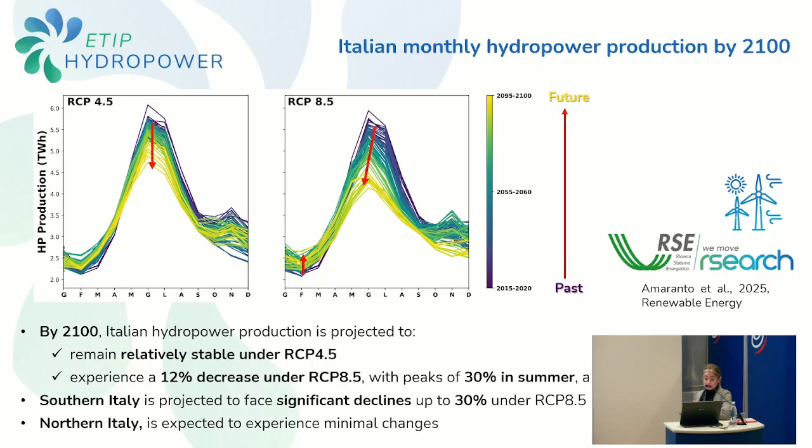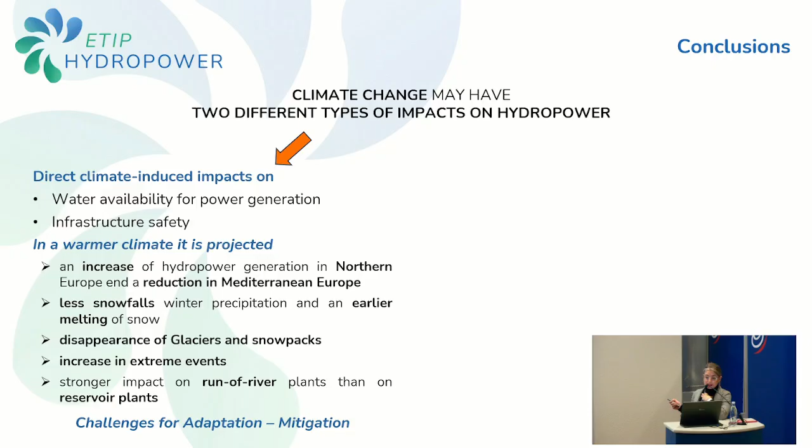What can we conclude about that? That climate change may have two different types of impacts on hydropower. First, direct climate-induced impacts regarding water availability for power generation, but also infrastructure safety. In a warmer climate, it is projected an increase of hydropower generation in Northern Europe and a reduction in Mediterranean Europe, less snowfall winter precipitation, an early melting of snow, disappearance of glaciers and snowpacks, and an increase in extreme events, with a stronger impact on run-of-river plants than on reservoir plants.

All these points are challenges for adaptation and mitigation. But we have also another type of impacts, indirect impacts, because we have an increased competition for water resources within the energy sector, like hydropower versus thermoelectric plants that need water for cooling, but also among economic sectors like tourism, agriculture, and energy. We have issues also about transboundary water energy management among countries that sit on the same basin, but also among different authorities and water energy operators that can be public or private. All these points are challenges for the water energy nexus.

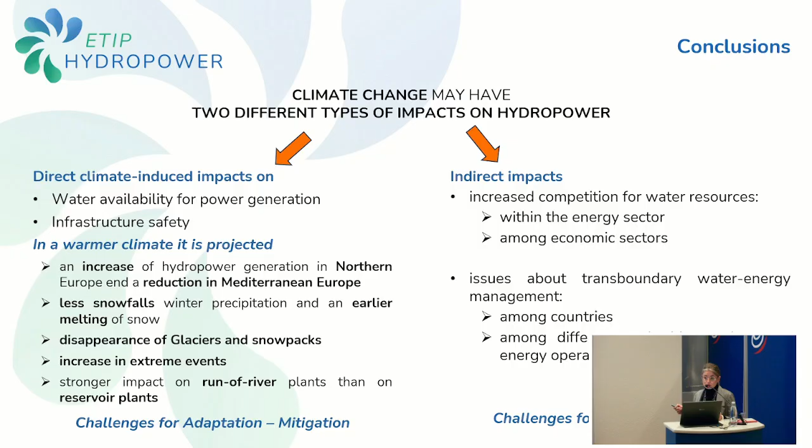All these conclusions are included in the white paper that will come soon. But I'd like to show you in anteprima the key takeaway messages of the white paper, because the aim was to provide some suggestions to cope with climate change. What can we do to adapt to this future condition?

We can have modernization and infrastructure upgrades to improve resilience against extreme weather events and fluctuating water availability. But we have to optimize the operation to ensure the flexibility required by the grid and integrate photovoltaic and wind power generation to secure security and reliability of energy supply for the population.

We can also optimize the digital and predictive systems with real-time monitoring, hydrological forecasting systems integrated in the management to enhance the efficiency of both power generation and water resource management. We have the possibility to manage the resource in an adaptive manner, because hydropower reservoirs are multipurpose tools, by developing innovative reservoir flow regulation strategies in response to seasonal flow variabilities.

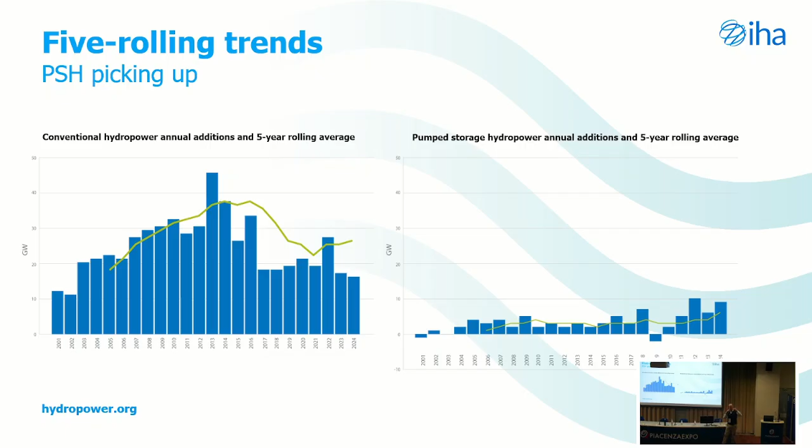On the other hand, pump storage is picking up. It's starting from a very small amount. Over the last 20 years, probably you would have heard very few people speaking about pump storage. It was mostly developed in Europe around the 60s and the 70s to support the nuclear fleet. And now suddenly it's coming back as an important piece of technology because we need to integrate, as we said before, the large amount of wind and solar that are being introduced in the power system. But also we are looking for ways to provide long-term flexibility that is lacking in the system so much at the moment. And we see that trend, indeed: if you look from 2021 onwards, pump storage has been systematically growing at a rate above its 5-year rolling average.

So the good news is that to achieve the 1.5 degree Celsius temperature cap or the 2 degree Celsius limit, both indicated by IRENA and IEA, we have enough potential out there. There is enough hydropower to achieve those targets. And there is a big challenge because it needs to almost double the existing fleet. So between now and 2050, if we really want to achieve a sustainable and decarbonized power system, hydropower needs to double. The bad news is that the existing pipeline is far from being sufficient.

That means we have a gap. We not only need to develop those projects, and most of these projects are slowly moving forward because of a number of reasons, Jean-Jacques in the previous presentation mentioned most of those. But on top of that, we still need to identify circa an additional 500 to 700 gigawatts of hydropower projects. Let's really remain on the good note here, though. We know that the potential is there. And the potential corresponds to technically feasible, economically feasible, and according to the publications we looked at, environmentally sustainable, meaning outside protected areas.

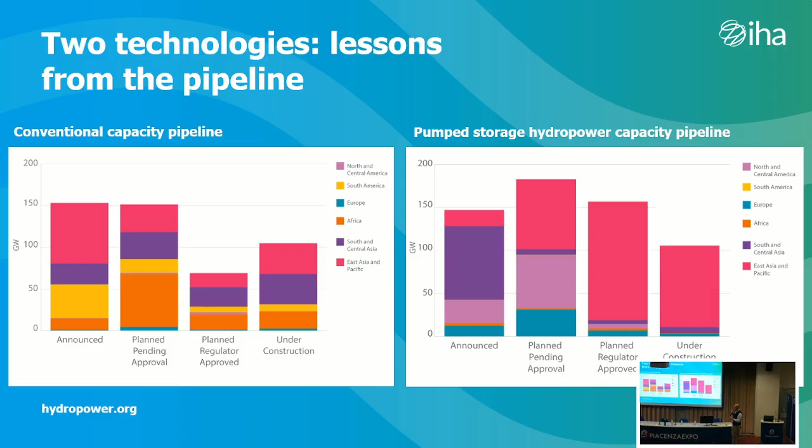Maybe in Europe, we should start asking a couple of questions about which technologies we're going to choose to store our power. China seems to have a very clear idea about that. Now, let's link that to Europe. In Europe, we had last year a generation of circa 680 terawatt hours, 444 megawatts of new installed capacity coming online. Most of it was rehabilitation, modernization, small hydropower projects.

We have 263 gigawatts of installed capacity overall, and 56 gigawatts, actually, not megawatts, sorry, here is where I got confused in this infographic. It should be total pump storage installed capacity, 56 gigawatts in Europe, not megawatts. Now, this is the same exercise as before, the pipeline. This is how the European pipeline looks at the moment.

We have a lot of projects, and I say a lot of projects, in pump storage capacity. Sorry, I had to change the unit in this chart. They look very similar, but actually there is almost a factor of 10 between the y-axes of these two charts. That tells us that in Europe, it's clear what's happening. What is currently being developed is pump storage.

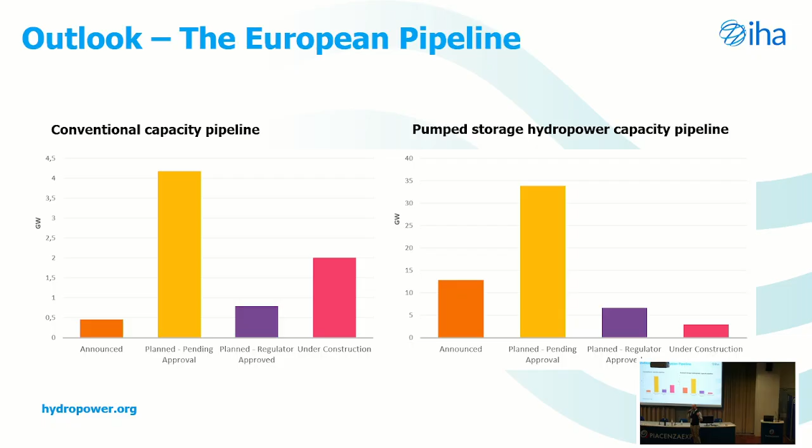Let's imagine that on average, this could have a 10-hour retention capacity. We're speaking about 600, 700, 800 gigawatt hours of storage capacity that could be delivered there. This is more than what we need. Now, as I said before, we are approaching the point at which pump storage could start providing more additional capacity.

The issue that we see is that the pipeline is very healthy, but it's very healthy mostly when we look at China, which is responsible for 80% of the pipeline, partially Europe, Australia, India also, thanks to some very innovative and forward-looking regulation that has come online over the last few years. But apart from that, the world is quite stuck. It's not really moving and understanding this technology on a global scale yet.

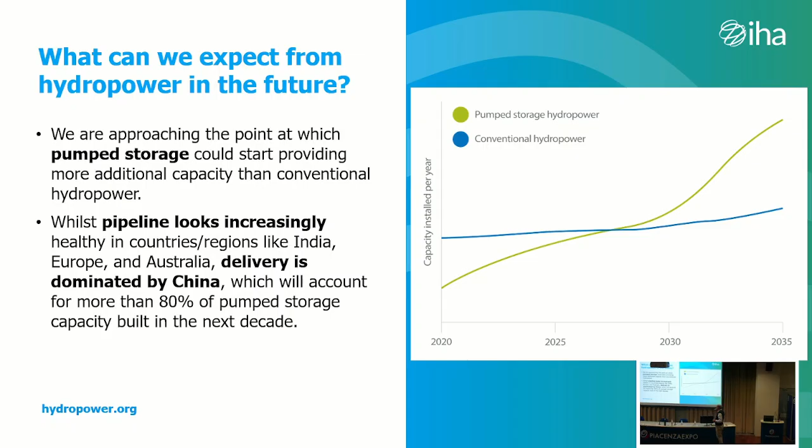Okay, so this was a bit of the introduction. I just wanted to give you this overview of the hydropower sector. As IHA, we are really keen on helping the sector understand where we are going. Pumped Power. This is a project that we launched last year in cooperation with Eurelectric. I'll give you a bit of background behind that. It came after reading the Draghi report.

Most of you might have read that report. I was reading that report, and what I noticed is that actually that report was screaming hydropower without saying hydropower. It never says hydropower. That's scary on one hand. But on the other hand, it was saying, in Europe, we have a problem because we don't own the technology for the energy transition. Well, false. We have hydropower, which is the greatest, the most installed, the most productive renewable energy technology in the world.

Apart from that, B, we have a problem with imported fuels. Well, hydro could solve that. We have a problem with very high electricity prices. Well, pump storage and hydropower could solve that. We have a problem because we don't have a supply chain, so each time we buy technologies, money ends up flowing somewhere else. Wrong. We still have the technology in Europe. 50% of the hydropower products sold around the world come from Europe.

So after reading this report and seeing so many elements that were screaming hydropower, but then the conclusion was not going there, with Eurelectric we decided to set up this initiative called Pumped Power, which was really meant to describe the role of hydropower in securing Europe's energy future. The outcome of this work that we did together was the Paris Pledge. The Paris Pledge was basically a paper that aimed to do three things.

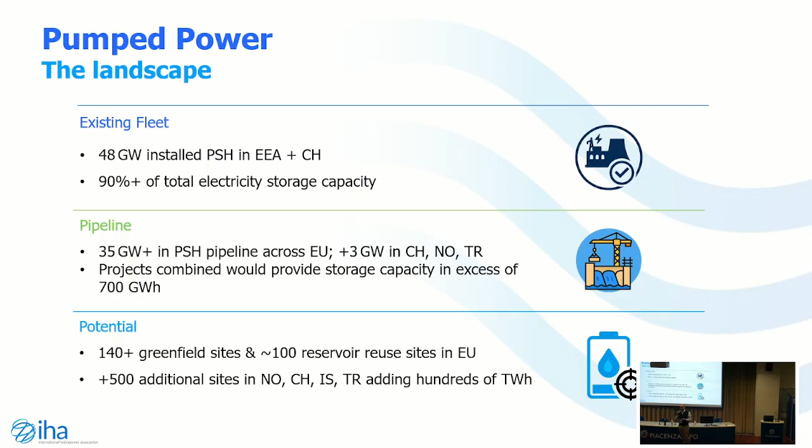This is the waste we have in Europe today when we curtail power coming from variable renewable energies. It's already huge. It costs 4.3 billion. This is not me saying it, it's ENTSO-E. And this could rise further. If we don't take action and just keep introducing variable renewable energies to the system, the number could go up to 118 terawatt hours by 2030. It's a huge number. We are almost speaking about the entire consumption of a medium-sized European country, wasted for no one.

We know about the increase in demand and flexibility. Leonardo presented it very well before: 3 times more flexibility by 2030, 7 times more by 2050. But another important point is negative prices. Because the market at the moment is really not capable of understanding what to do with this extra power, and because of a number of other elements, including subsidies and the lack of consumers' capability to absorb that power, we face more and more hours with negative pricing due to the lack of flexibility, which are no good for the system.